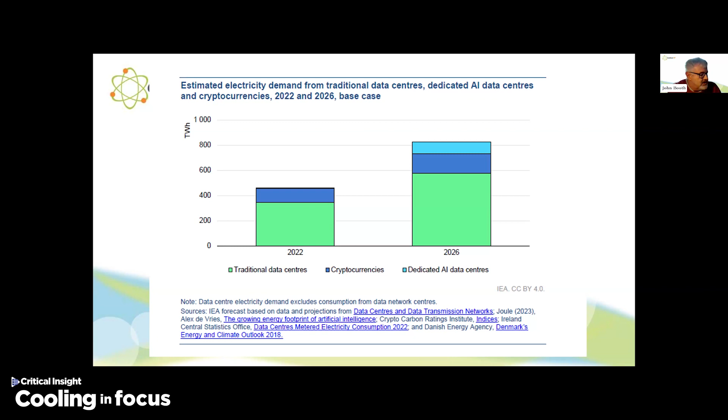Again, I have to say, I think it's a bit smelly. So I think the problem with data center energy is that globally, we're only reporting the top of the iceberg, when in fact, 85% of data center energy consumption, and when I say data centers, I'm including server rooms, mobile phone, telco towers, and the communications networks in that. So we're only reporting the top 15%, and we're not looking at the actual iceberg itself, which, as I said earlier, is a problem for policymakers, regulators, and

operators. So in terms of cooling, how much DC energy goes towards cooling? In legacy sites, it could be as high as 50%, or in some cases more. I've personally been to sites with PUEs of 10, which would indicate that 90% of the total energy consumption is being used for infrastructure, including the mechanical cooling. And in some of the new sites, it could be as low as 10% of overall energy consumption. So that would be PUEs of 1.1. There are many examples of sub 1.1 PUEs as well, mostly in the Nordics because they're adopting free cooling.

So cooling quick test for everybody. Why do we cool data centers? I'll answer that in a minute. What's the ambient temperature in your data center? What's your humidity window? And why? Right. So these are questions that I ask when I'm delivering my training courses to operators. Let's see what the general answers I get back. So first question, it's usually thermal shock to components, comfort cooling for staff, and to reject the heat. Yeah, okay, I'll go with all of those.

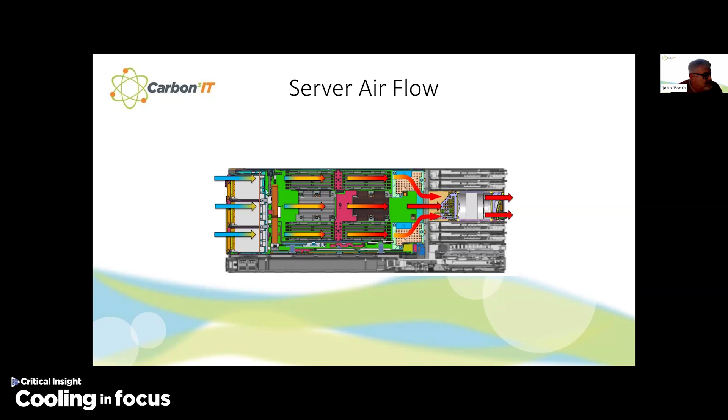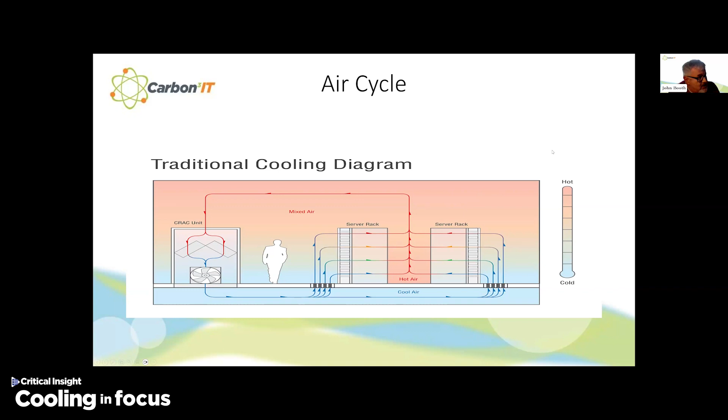So in a conventional air cycle, we have cold air that's coming out of the CRAC unit into the raised floor. We bring it up through tiles. It's drawn in through the integral fans through the servers, gets heated up, and then the hot air rises, basic physics lesson, and then we direct it back into the top of the CRAC unit, and then it passes across the coils. The waste heat goes outside and is dealt with somewhere else, and then we've got now cold air, and we push that back under the tiles again. And that's all very well defined. A lot of people sometimes know that, although I have been on sites where I ask them about the air cycle and I get a blank stare.

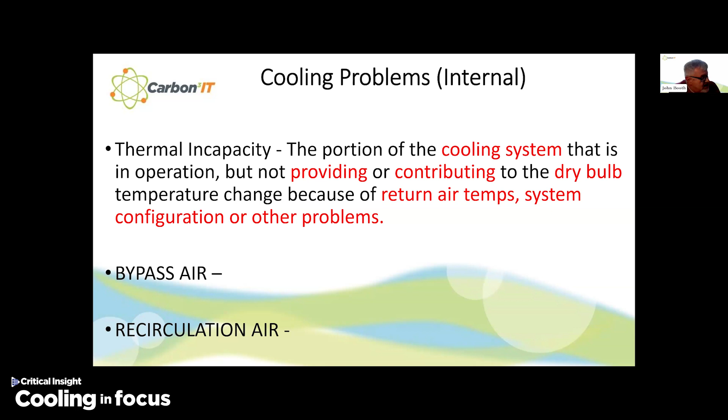So the problem is that we get thermal incapacity, and that's the portion of the cooling system that's in operation but not providing or contributing to the dry bulb temperature change because of return air temperatures, system configuration, or other problems. Bypass air, for instance, and also recirculation air. But both of those problems can be solved by the use of the EU Code of Conduct for Data Center Energy Efficiency. And the latest version is the 15th edition, 2024, which was published probably 4 weeks ago and is available on this link. It contains 53 best practices.

So just a reminder, if you go onto or download the publication and look through it, there are expected best practices depending on where you are in your cycle. So if there's a green best practice, it's expected to be applied to all. If it's new software, it'll be purple, new IT equipment will be yellow, and if you're doing a new build or retrofit, you're expected to do the best practices that are for the M&E, and the optional ones are in white. So let's quickly go through them.

So section 5 contains 7 subsections: airflow management and design, cooling management, temperature and humidity settings, cooling plant, which is split into free cooling and economised cooling depending on the geographic location, and high efficiency cooling plant. We then have computer room air conditioning handlers, direct liquid cooling, and then finally reuse of data center waste heat.

So let's look at the first section, airflow management and design. First best practice for new builds and retrofit is design for the hot and cold aisle. Second is design for contained hot and cold aisle. Third is design and contain for hot and cold air retrofit.

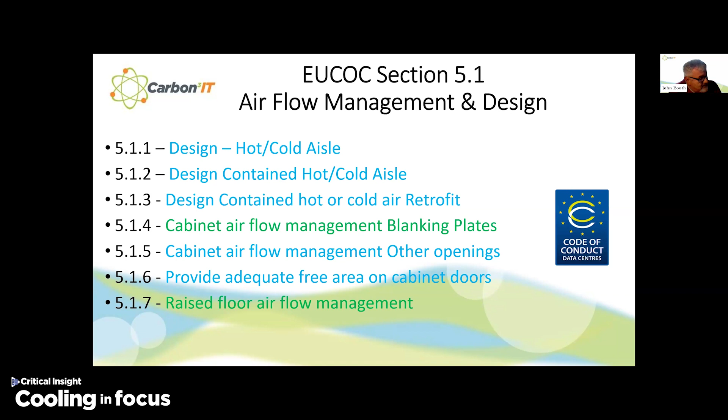Then manage that air using cabinet airflow management blanking plates. Cabinet airflow management for other openings in your floor. Provide adequate free area on cabinet doors. Raised floor airflow management, and then raised floor airflow management in terms of obstructions.

Design return plenums. So this would be ducting basically that goes from your hot aisle and directs the hot air straight into the top of the CRAC unit without hitting into the roof area. Think about your design, raised floor and suspended ceiling height.

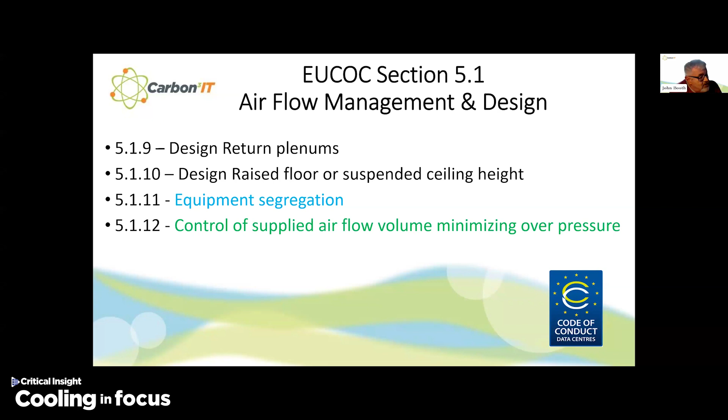Think about equipment segregation, and that's for legacy and tight environmental control equipment, where you might need it either to be cooler and have a smaller range of humidity, or a transmission piece of kit which can actually operate at higher temperatures. Your control of supplied air volume, minimizing overpressure.

Let me move on to cooling management. So scalable and modular installation and use of cooling equipment, shut down unnecessary cooling equipment, review your cooling before your IT equipment changes, define and review your cooling strategy, define and review your CRAC settings. An optional best practice is the dynamic control of building cooling.

Review and widen your working humidity range. So instead of being 45 to 55% RH, move to maybe 30 to 70. Look at your expanded IT equipment inlet environmentals. Consider separate environmental zones and separate environmental zones for colo managed services. So this is basically moving your transmission equipment to meet the rooms.

And in cooling plant, we've got free cooling, economised cooling, and there are a number of solutions: direct air, indirect water with dry cooler and CRAC, indirect water cooling with CRAC and integrated free cooling coil, indirect water free cooling with CRAC and free cooling chiller.

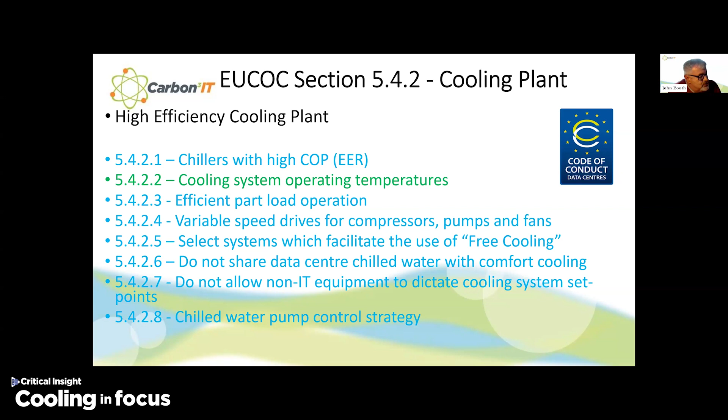Select systems which facilitate the use of free cooling. Don't share your data center chilled water with comfort cooling. And do not allow non-IT equipment to dictate cooling system set points. And then have a chilled water pump control strategy.

For CRACs and CRAHs, variable speed fans, control on supply air temperature, not return. Run variable speed CRACs in parallel. Sequencing of CRAC units. Do not control humidity at CRAC unit. Cooling size and selection. And then for direct liquid cooling, and this is quite disappointing personally, there's only one best practice.

And then for the reuse of data center waste heat, there's waste heat reuse, so kind of formulating that you should be using your waste heat. Then heat pump assisted waste heat reuse, and use your data center waste heat within your system boundary to warm your office, generator, or fuel storage areas.

Consider the energy use metrics and reporting, which are now part of the Energy Efficiency Directive. And then think about capture-ready infrastructure. So this is basically to make sure that you extend your cooling loop to the perimeter of your buildings so as to be able to connect to an existing or a future district heating network.

So just to cover, we've got 12 practices in airflow management and design, 8 in cooling management, 5 in temperature set point settings, cooling plant, 8 in free cooling, 8 in high efficiency cooling plant, 6 for computer air handlers, 1 for direct liquid cooling, 5 for data center waste heat. In total, 53 best practices. That's almost a third of the code of conduct. So you can see that it's considered to be quite important.

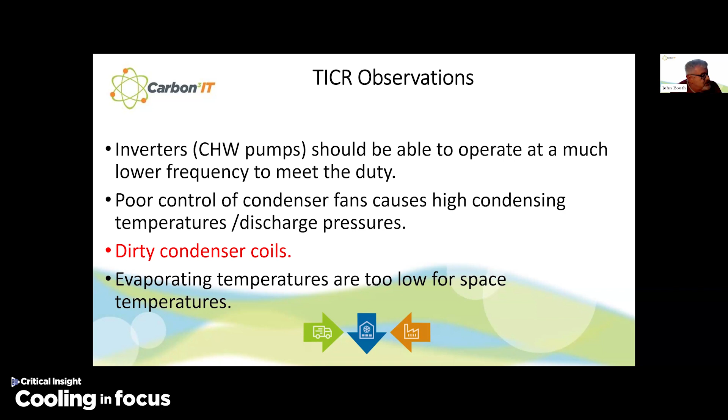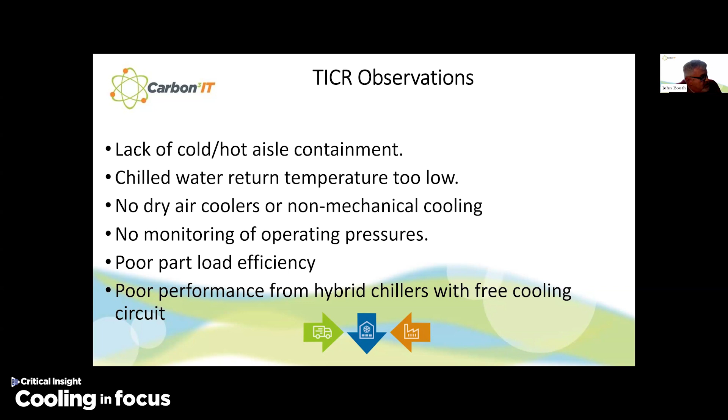And we found that evaporating temperatures are too low for space temperatures. We found a lack of cold and hot aisle containment. We found that the chilled water return temperatures were too low. We didn't find a lot of dry air coolers or non-mechanical cooling. There didn't seem to be any monitoring of operating pressures. We found poor part load efficiency. We found poor performance from hybrid chillers with free cooling circuits. We found the delta T between flow and return temperatures looked lower than expected.

We found DX discharge lines insulated outside of the building. And that's another easy win. So if you've got insulated pipework coming from your internal to the external, remove that insulation. It's really not needed. The whole of the cooling plant should be classed as a level 3 secure area. So the only people that should be allowed in it are data center personnel and air conditioning personnel, and they should know how they should operate in that area.

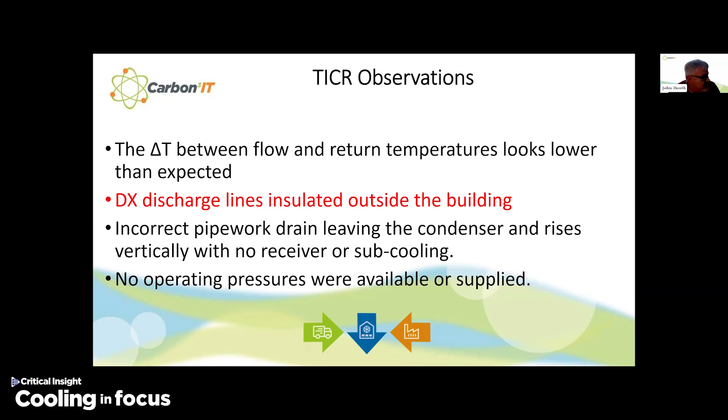We found incorrect pipework drains, leaving the condenser and rises vertically with no receiver or subcooling. This is where basically you're using more energy to get your fluid around the system. And in the service records, we found no operating pressures were available or supplied by the manufacturers or the service company. We found the system lifts were too big. We found no fan speed control for dry air coolers. We found disproportionate pump power.

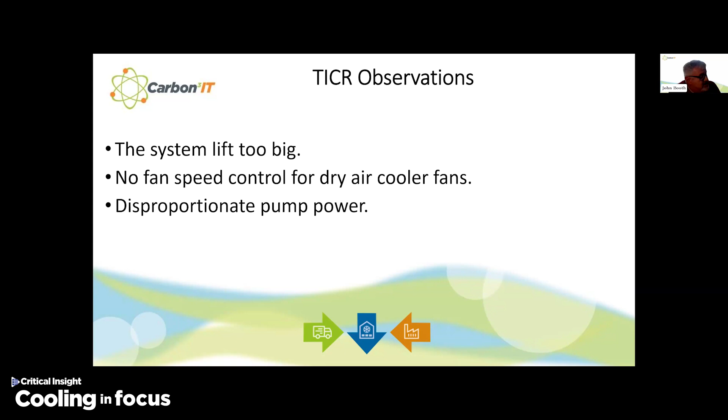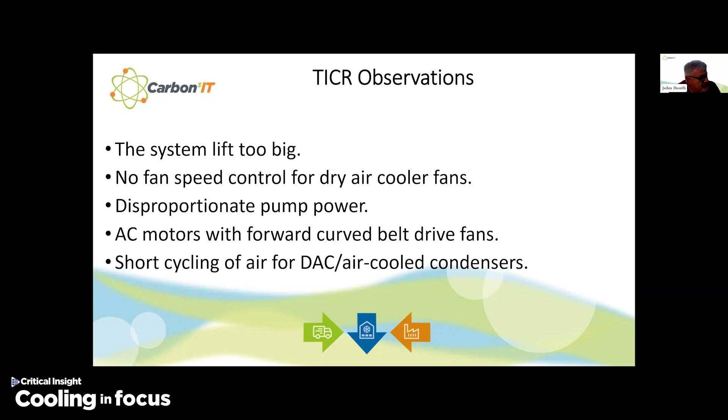AC motors with forward curved belt drive fans, basically they're always on, so they should be EC fans, which is a code of conduct best practice. And we found short cycling of air for dry air coolers and air-cooled condensers. Very little use of adiabatic dry air cooling. That was on our survey sites. There is probably more adiabatic dry air cooling out there in other sites. We didn't find any safe way to clean the condensers or the dry air coolers.

And then we found that the DX liquid line pipework is not insulated in the data hall, so this is actually providing parasitic heat to the data center. So yeah, insulate them inside the halls and take off the insulation outside the halls. So this is who we're working with on that project: ourselves, Carbon Trust, Carbon Technologies, Institute of Refrigeration, Star Technical Solutions, University of Birmingham and London South Bank.

So moving on to legislation, and although this is primarily EU legislation, as part of our TICR project, we have to provide recommendations to DESNZ, and so there is a distinct possibility that the legislation will hop over the channel. So here we have data centers. Currently, in order to obtain green finance, you'll need to, if requested, do an assessment under the Taxonomy Climate Delegated Act to the assessment frameworks available on the EU Code of Conduct website for the investment partners. So that's downward pressure on the data center. We also have the Corporate Sustainability Reporting Directive, and in the UK that would probably be the Streamlined Energy and Carbon Reporting.